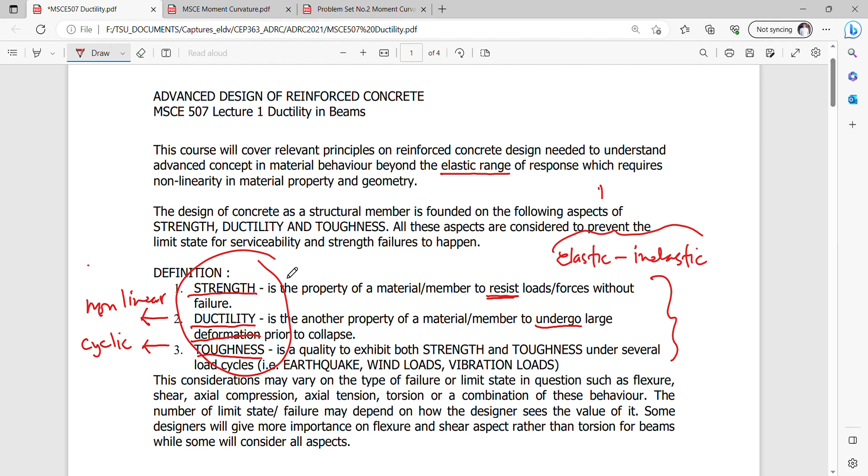then we can say that your beam design constitutes these three important properties to resist loads coming from earthquake, wind, and other vibration loads. So these considerations have to be met with all the limit state conditions like flexure, shear, axial compression, axial tension, torsion, etc., or combination thereof.

And the number of limit states will depend on the designer, the way the designer sees the value of it. Some give importance to flexure, some give importance to shear, depending upon the type of the member or the type of behavior that is expected in the member.

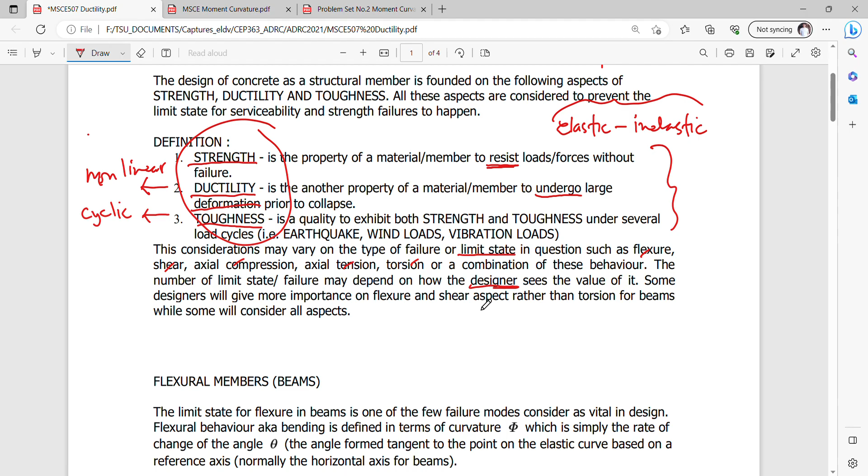So today we will be only focusing on the limit state condition wherein the flexural behavior is being met. And we start with defining...

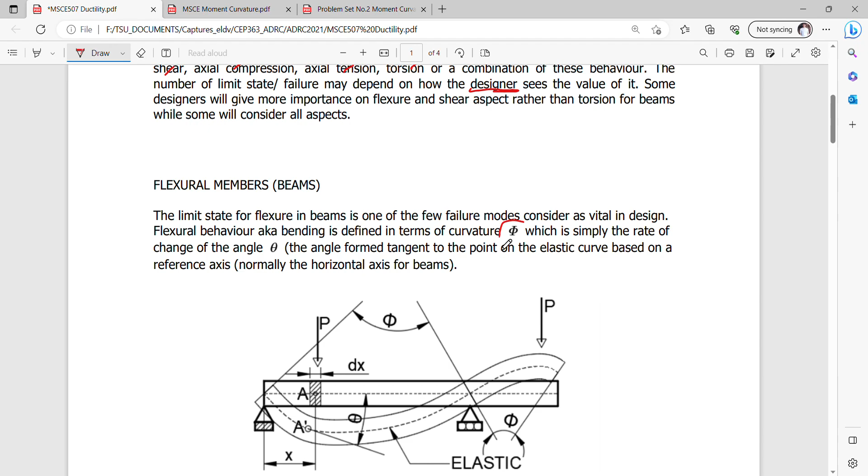some behavioral terms like curvature, which is defined in this figure as simply the angle upon which this elastic curve is drawn by subtending two lines, creating a point or center of rotation. So the angle subtended by these two lines at points within the supports' location defines your phi1 here, and from the right support to the free end defines another curvature, say phi2.

So the relationship between this deflection and its derivative may be noted in our elementary mechanics as EIY, but we are more familiar with this moment equation, which is the second derivative of your displacement or deflection, and this part here, m over EI, is actually the curvature that we are talking about.

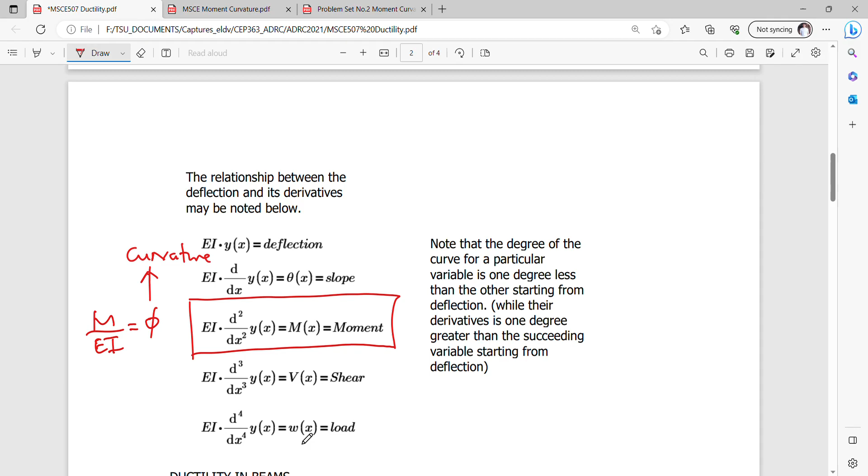So if we divide the moment with this flexural rigidity, that is what curvature is all about. Differentiating it twice will yield the shear and load equations, and integrating it twice will yield the slope and deflection. So this is the basis for our double integration method that we have been using to solve for deflection.

Note that the degree of the curve for a particular variable is one degree less than the other starting from the deflection, while the derivative is one degree greater than the succeeding variable starting from deflection.

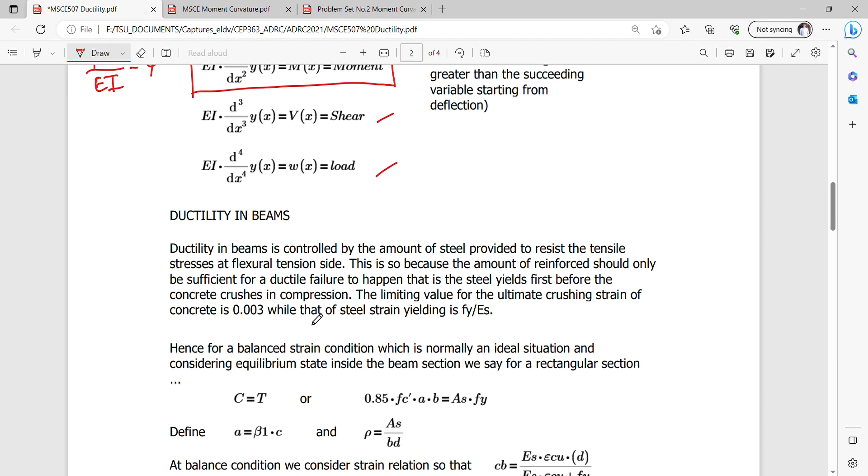So in the ductility of beams now, we relate these equations in a way that the equilibrium condition for the internal forces should be satisfied. So if we want to solve for or measure the ductility, we need to convert these curvature equations into an internal curvature, which is simply defined on the basis of your strain diagram.

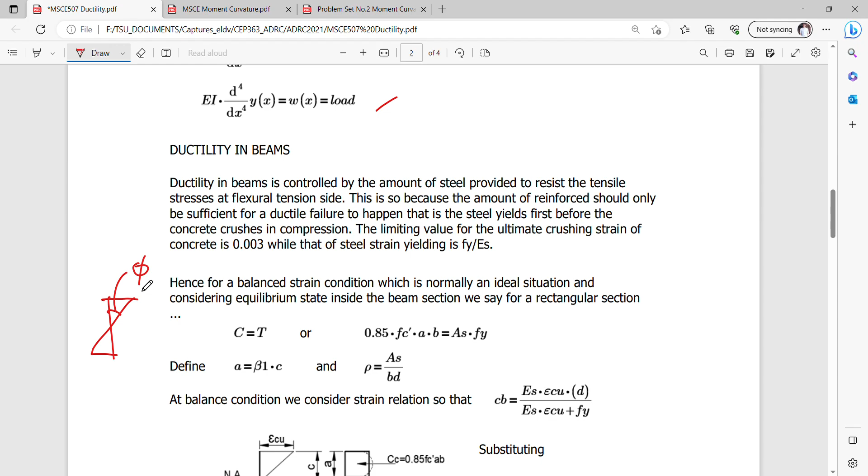So this angle here is actually the curvature, the same as the curvature discussed here in your elastic curve. If we cut the beam here and get the original slope, we have a representation of the curvature phi, which is simply subtended from this line to this line. So this is actually the phi that we are talking about here.

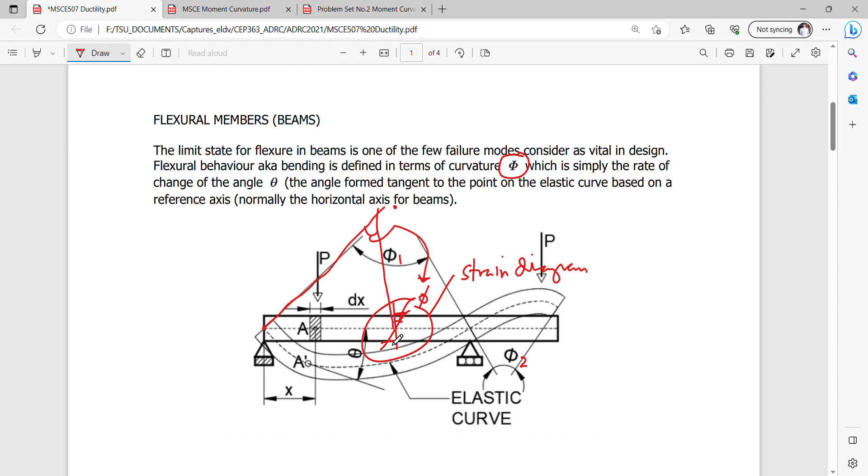So this is simply what? It is simply the strain diagram at this particular section. So at any particular section, the curvature is different, depending upon the loading condition, etc.

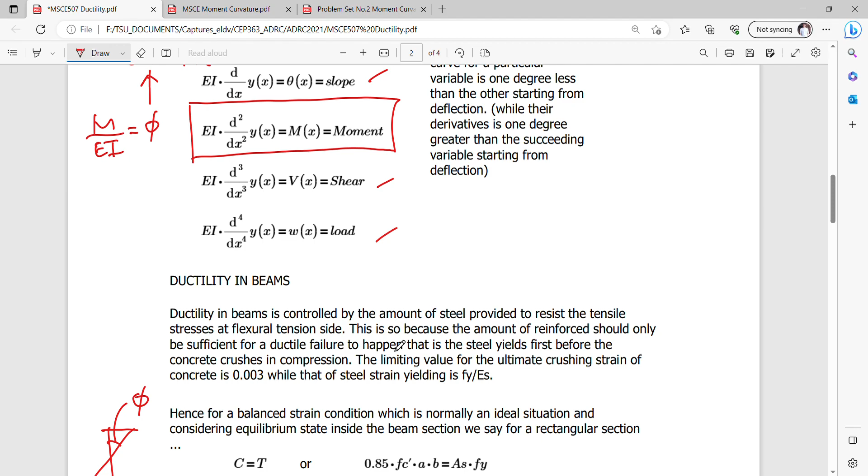So this curvature can be expressed in terms of the strain over the distances from the neutral axis. If we want to get the curvature at this point, we simply get the value of the strain and this value of c, and divide it. So phi is simply the arctangent of the value epsilon c over c, or for small angles, phi is approximately equal to tangent phi, which is simply epsilon c over c.

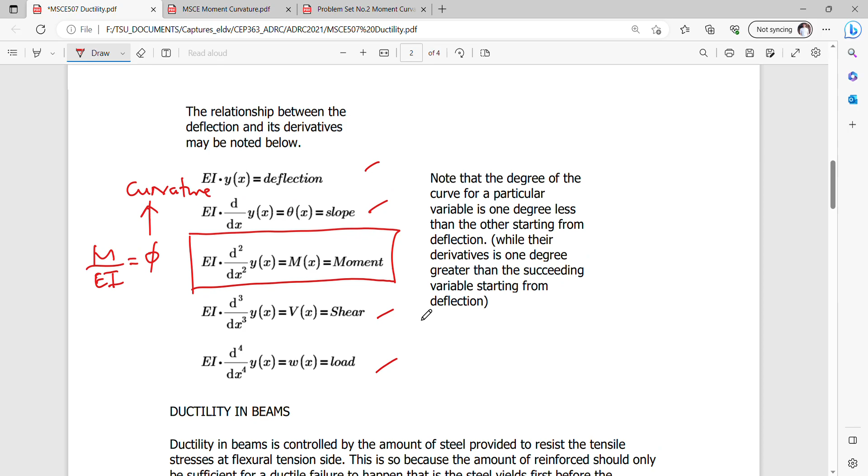So this same curvature is defined in terms of the internal strain relationship, which is the same as this elastic curvature defined in terms of our elastic curve diagram.

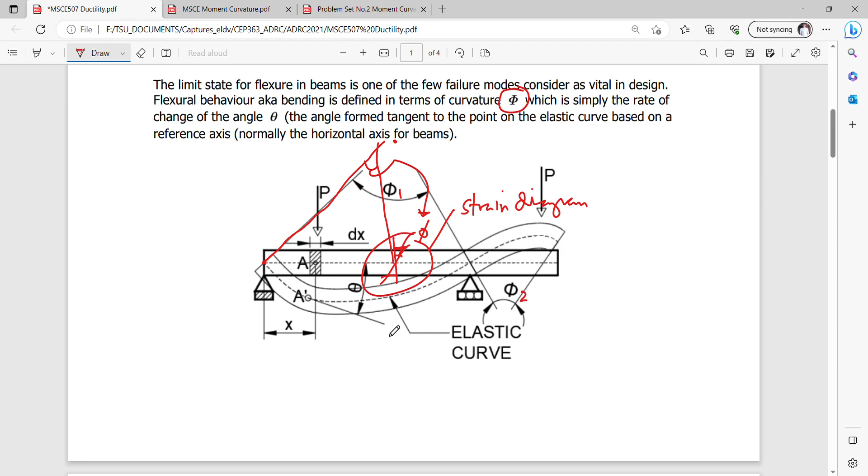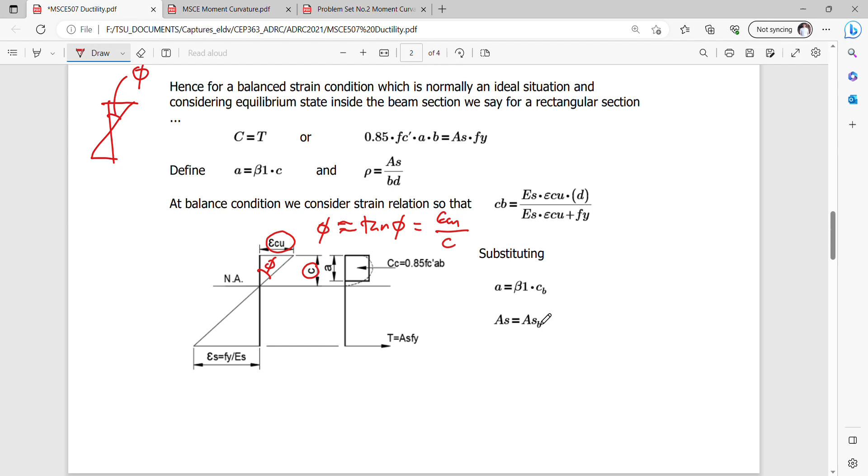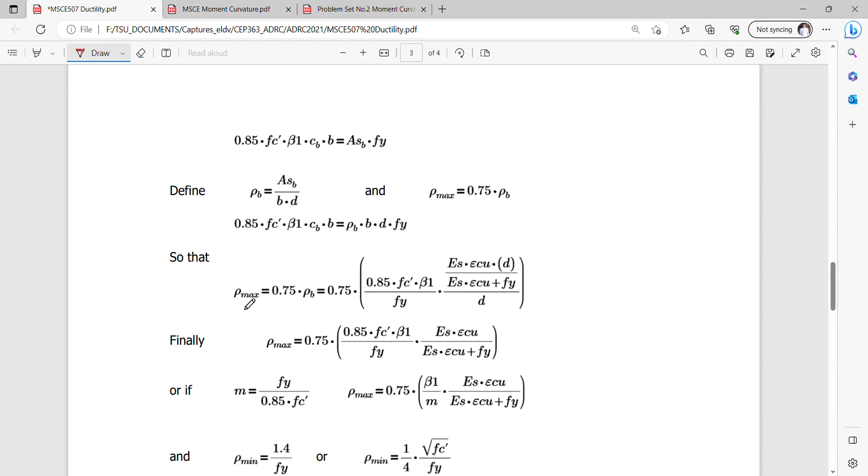For the equilibrium conditions, we know that C equals T and A is defined in terms of beta 1C. We can now come up with some mathematical formulas using this relationship, such that if I want to get the maximum steel ratio to ensure a ductile mode of failure, this is actually simply the maximum ratio, which happens to be your limit for ductility in beams.

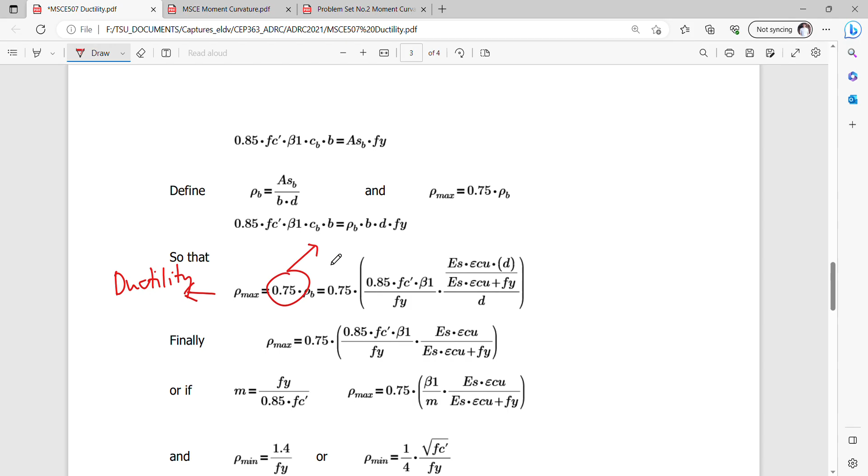The 75% or 0.75 there is simply a factor of safety of 1.33 given to the beam to ensure a ductile failure. If we divide the rho balance by 1.33, it will give you 0.75 rho balance.

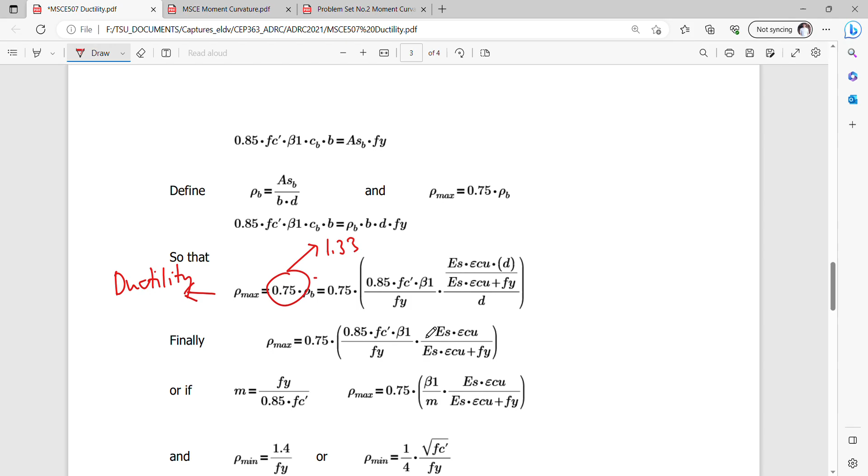So the rest are actually very familiar formulas, and this rho minimum, which is a derivative of the cracking limit of your beam, from an uncracked to a cracked stage, is given by this. The derivation I have not introduced here, but this is a very familiar formula, and it has to be compared with 1 over 4 square root of fc prime over fy to ensure that the beam will behave in a ductile fashion.

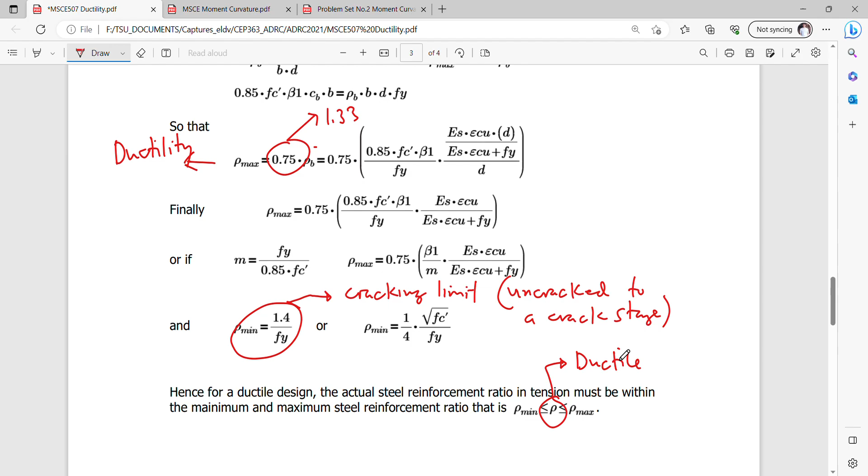So within this range of rho minimum and rho max, rho must be in between to ensure a ductile failure. Okay, so that's it for the ductility conditions.